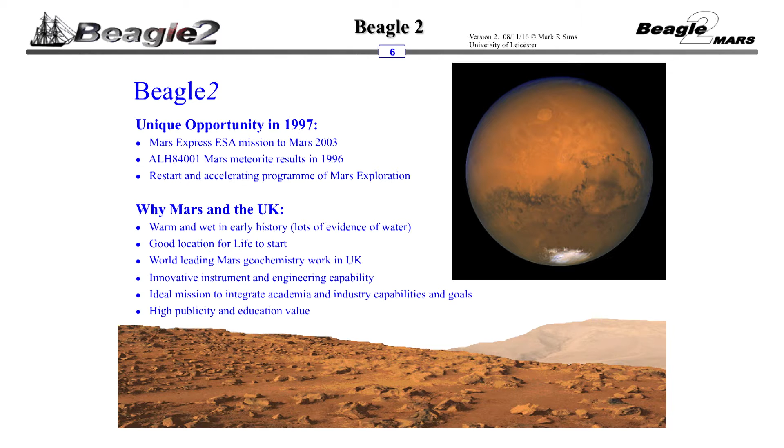Why bother with Mars? I should explain that the picture behind me, if I can focus this, is actually the best view you'll get of Mars from Earth. It's a bit of a cheat because it's taken with the Hubble Space Telescope, and you see this red world, thin atmosphere, ice caps, etc. Very cold, very inhospitable to life as we know it today.

But 4 billion years ago, 3 to 4 billion years ago, it was probably warm and wet. We have definitive evidence of that. Lots of evidence of water on the surface, and a good location for life to start. So that's why people want to go and explore Mars.

At the time, Colin's group and other people within the UK were world-leading geochemists. They still are today. And so it was natural that Colin would propose a lander and try and answer the question, is there or was there life on Mars, using the instrumentation and techniques he developed. Also within the UK, we're very well known for our innovative engineering, our innovative instrument design, and so that folded into the mix of Beagle 2.

And it was a unique opportunity back in 1997. It was the only European mission going to Mars. It was take that opportunity or not do it. And Colin saw this as an ideal mission to integrate both the academic interest in going to the planet and the industrial capability within the UK. And of course, a high publicity and education value of doing such a mission as Beagle 2.

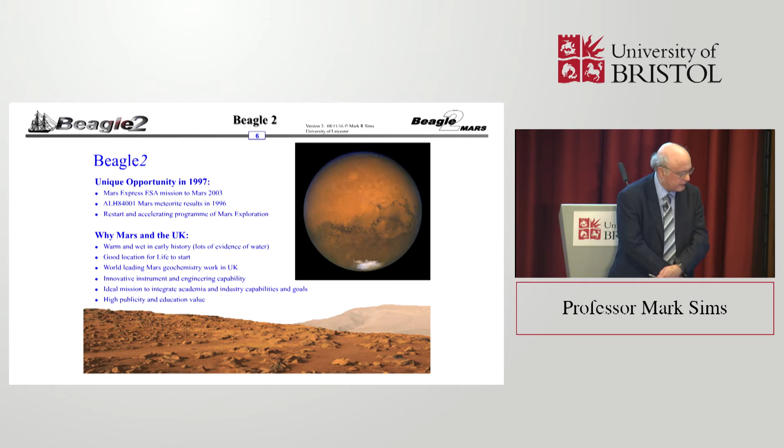Beagle 2 science was unique. Objectives at the time: detection of past life, extinct life, or extant life, present-day life, by looking for organic compounds in the soil, or regolith as it's technically termed. Analysis of subsurface material and the regolith, its geochemistry, etc. And the first attempt at crude radiometric dating by using the decay of potassium to argon in rocks. All of those have only just started to be achieved by Curiosity a long time after Beagle 2.

So the science program was looking at the geochemistry, looking at the minerals, how those minerals are put together in terms of what's called petrology, looking at chemical and physical analysis of the atmosphere, looking at how the landscape has changed, the so-called geomorphology, and measuring dynamic environmental processes on the planet today. And doing some astronomy on the planet as well, looking at the sun, the bright stars, and Phobos and Deimos, particularly the latter in actual fact, because that would enable us, if we got a picture of them, to locate our landing site with high accuracy.

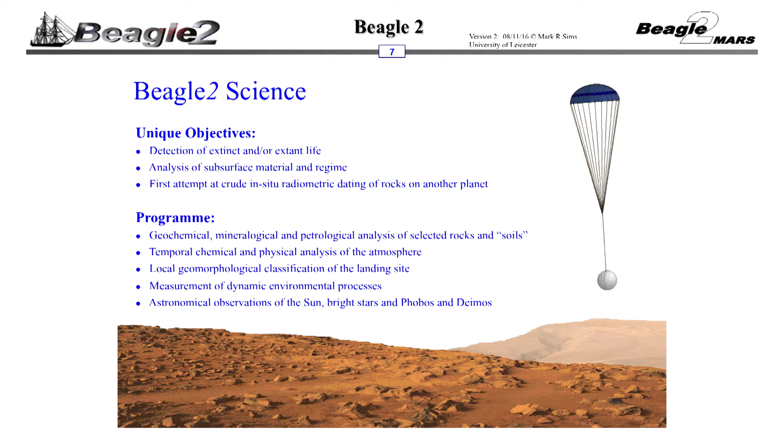In terms of the engineering, you've seen the model of Beagle 2 outside. It's roughly 1.8 by 1.6 meters, not that big. Mass of 69 kilos, of which about 8.7 were for the instrumentation, plus some hardware on Mars Express in order to spin it off the platform. Power is very, very low for Beagle 2. It typically was about 10 to 20 watts.

You'd like to think of it in terms of a modern light bulb. That's the total power that Beagle 2 consumed. And it had lithium-ion batteries. You're all familiar with those in your smartphones, tablets, etc. And solar arrays, state-of-the-art solar arrays back in 2003, built of gallium arsenide to get the maximum amount of power.

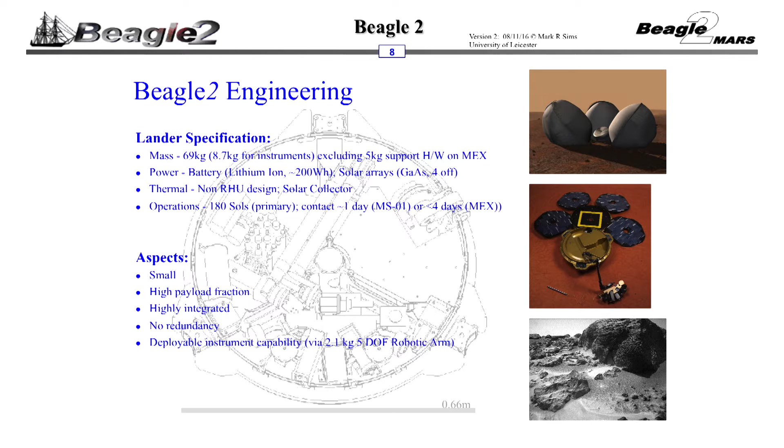Thermal design on Mars is tricky because the average surface temperature on Mars is minus 40 degrees C, and at night it goes down to well over minus 100, so you've got to have a good thermal design. A lot of the missions use radioisotopes to generate heat. Beagle 2 didn't. It had a very clever design using a solar collector, and it was designed to operate for a nominal 180 days on Mars, or 180 sols as they're called, talking to both NASA missions, Odyssey, and Mars Express. So Beagle 2, as you can see outside, is this pocket watch type design.

Beagle 2 had to fold up in order to get all the things we wanted within the volume we were allowed. It's highly integrated, with no redundancy, and it deployed some of its instruments on a small robotic arm.

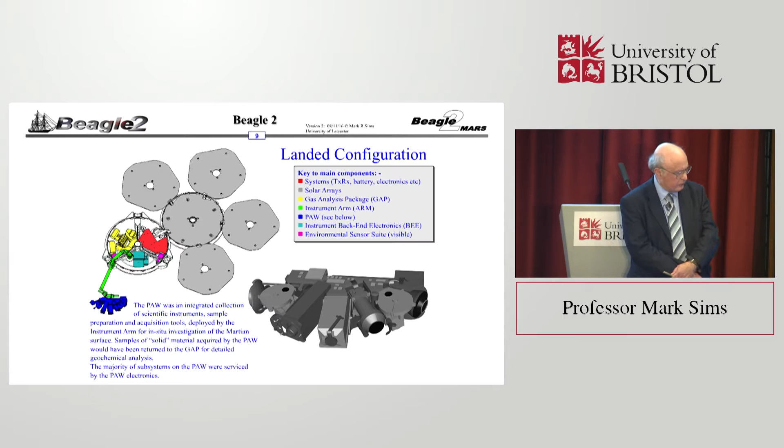We'll come back to that when we get to the questions. I'm not going to go too much through the details of Beagle 2 - some of that's for people interested in the technical detail. But here's a cross-section of Beagle 2 showing its base unit: the gas analysis package you'll hear about later, the electronics, the transmitter, the arm, and the so-called PAW assembly, which was a combination of instruments we'll talk about in a second.

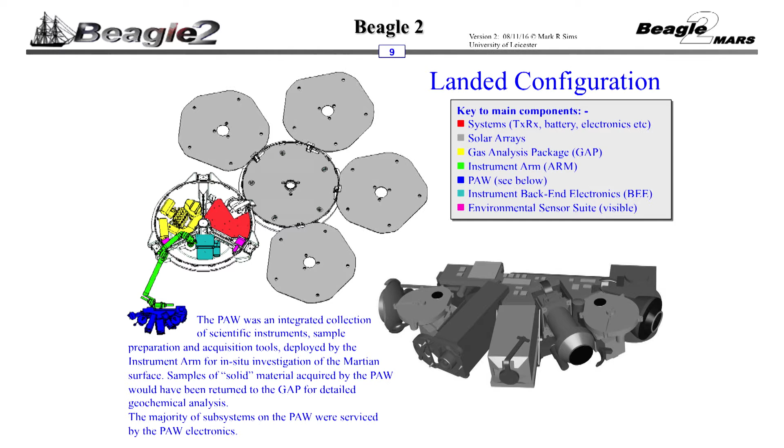So getting Beagle 2 to the surface of Mars - the so-called six to seven minutes of terror. It's the same for every mission: you have to slow the thing down. The first way you do that is using friction in the atmosphere, which heats the heat shield to very high temperatures.

You then want to stabilize the probe at supersonic speeds as it transitions to subsonic speeds, so it has a small pilot chute and a rear cover, which were then detached, and then the main parachute was deployed.

Beagle 2, as you saw in the animation, was cushioned on impact by a set of airbags which were inflated with ammonia gas. On impact with the surface, the main chute would have cut loose. Beagle 2 would have bounced across the surface and then deployed itself.

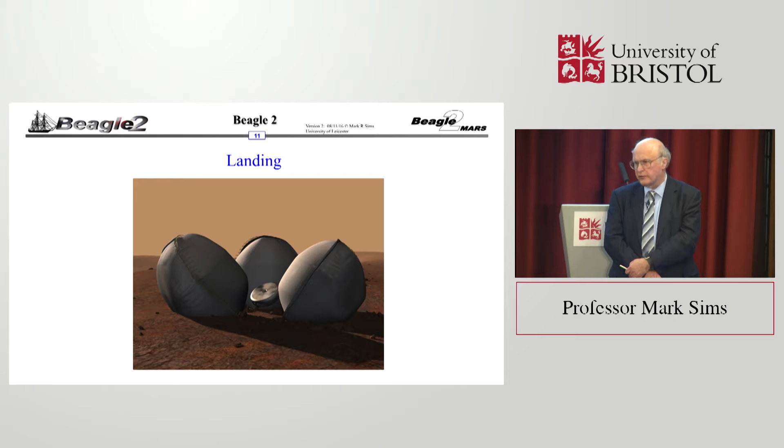So on landing, it would have looked something like this: large airbags about 1.2 meters across. Beagle 2, remember at this stage still folded up, would have been pushed away by their internal gas pressure, fallen to the surface, and then deployed itself.

So a bit of project history. Conceived, as I said, back in 1997 - the first official meeting was in May that year.

We then wrote a proposal to ESA, which I hand-carried on a plane to ESTEC in Noordwijk, Holland, and delivered it with a few hours to spare before the deadline. In May that year, the European Space Agency came back to us and said it's far too heavy - you're going to have to redesign it.

I was actually on holiday in Scotland and got a plaintive phone call from Colin saying, 'we've got a problem, what are we going to do about it?' So when I got back, we had a meeting and redesigned Beagle 2, which originally had a small rover on board, down to a static lander of 60 kilos. In the end, it ended up being 69.

In 1999 it was a busy year in terms of funding. We got an industrially-based project manager in February. In July we got some initial instrument funds, and later in the year Lord Sainsbury gave us our initial government backing. The ESA Science Programme Committee, which has to approve all missions, approved us in November that year.

Then in year 2000 we were vetted by NASA. John Casani, who was chief engineer at Jet Propulsion Laboratory at the time, came over and did an extensive review on Beagle 2. His conclusion was: what we're doing is nuts, but it seems to work, so keep going.

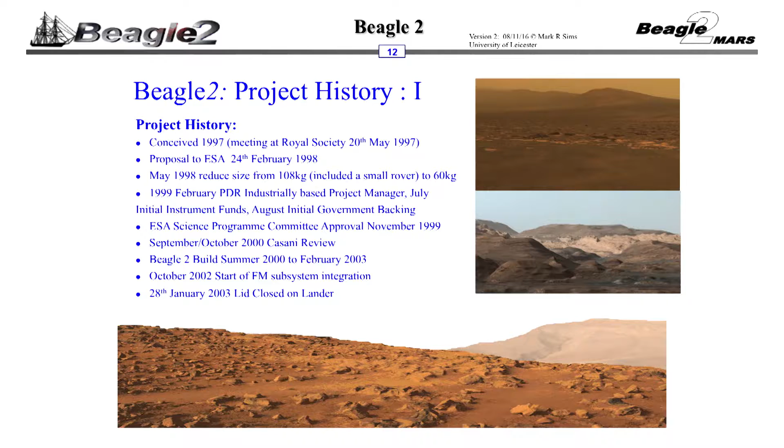So we got Beagle to the launch site by the skin of our teeth - I think we all fully accepted that. It was launched on a Soyuz Fregat launcher on the 2nd of June, 2003, and on the 19th of December we said goodbye to it.

It was spun off the main spacecraft - I'll show you a picture of that in a minute. Landing was due in the early morning of Christmas Day, 2003.

And then we never heard from it. We were expecting a transmission via a NASA spacecraft, and we expected a transmission to Jodrell Bank. We heard nothing. In March 2004 we essentially closed the book on Beagle 2 and did our own post-mortem.

In November 2014, we started to see some images of what could be Beagle 2 on the surface of Mars - I'm not going to spoil the latter part of my talk by discussing that now. The picture to the top right, by the way, is one of the latest pictures by Opportunity on the surface of Mars.

It's starting to explore this valley on the side of this crater, and the column in the distance is actually a dust devil on Mars, which is a few hundred meters across.

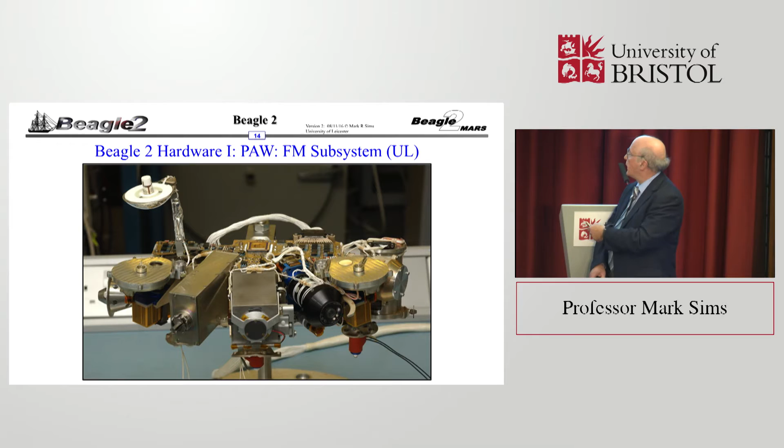So back to Beagle 2 hardware. This is a picture of the PAW assembly. We have 2 stereo cameras, a microscope, a corer grinder, an X-ray spectrometer which looked for the elemental composition of the rocks, and a Mossbauer spectrometer which looked at the iron content. Bolted along the back of the PAW was a so-called mole, a self-burying subsurface drill.

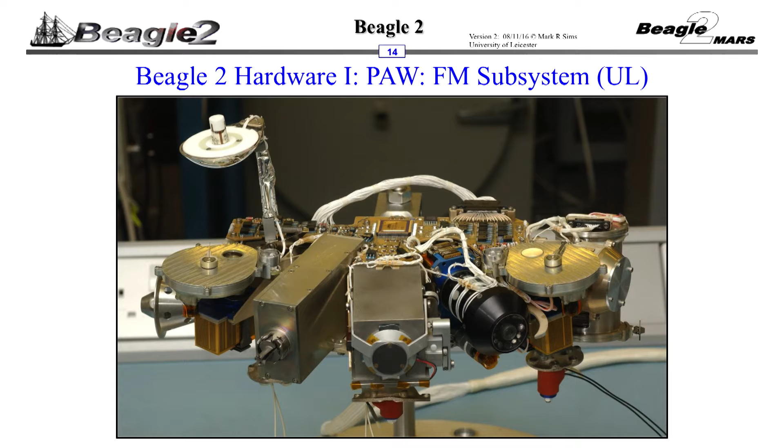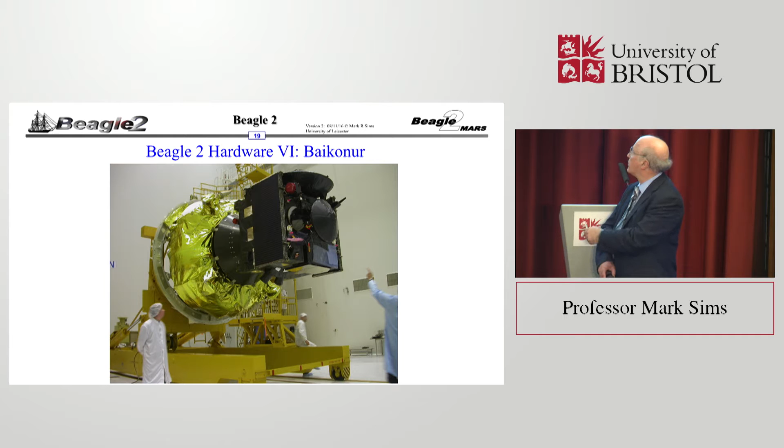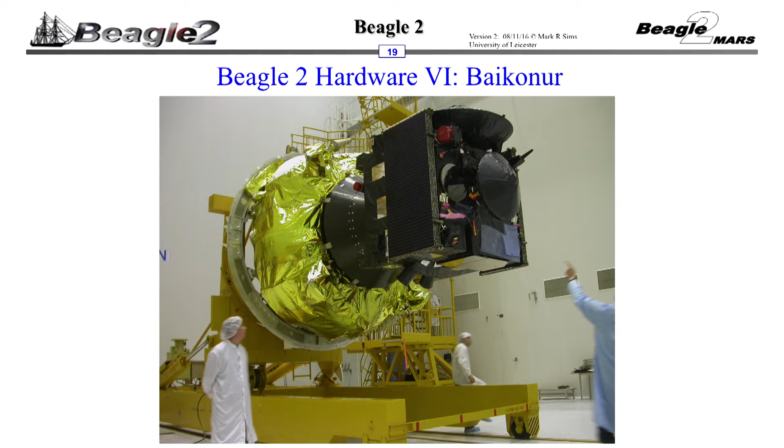Taken to the launch site, which was Baikonur in Russia, and mounted on Mars Express. Mars Express isn't that big, as you can see by the scale of the people, and Beagle 2 is now covered in a rather nifty black MLI, which has higher performance than the shiny stuff. On the 2nd of June 2003, successfully launched and on its way to Mars.

We checked it out a number of times on the way to Mars, including updating the software. As far as we were concerned, Beagle 2 was healthy and ready to land on Mars.

At 8:31 on the 19th of December 2003, Beagle 2 was spun up in order to give it some stability before it hit the atmosphere. Think of a gyroscope - if you try and topple it, it will tend to stay upright. That's why Beagle 2 was spun up.

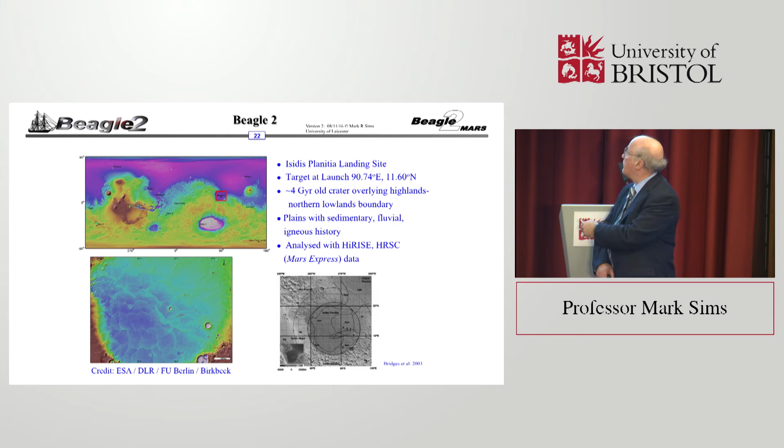So where was Beagle 2 aimed at? It was aimed at a place called Isidis Planitia, a big old impact site on Mars. When an asteroid hit 4 to 4.5 billion years ago, it was then backfilled with what we think was sedimentary fluvial rock and also igneous rocks.

This is a close-up of the Isidis basin, and that little area there, which actually isn't that small - it's over 60 kilometers long - is where Beagle 2 was targeted.

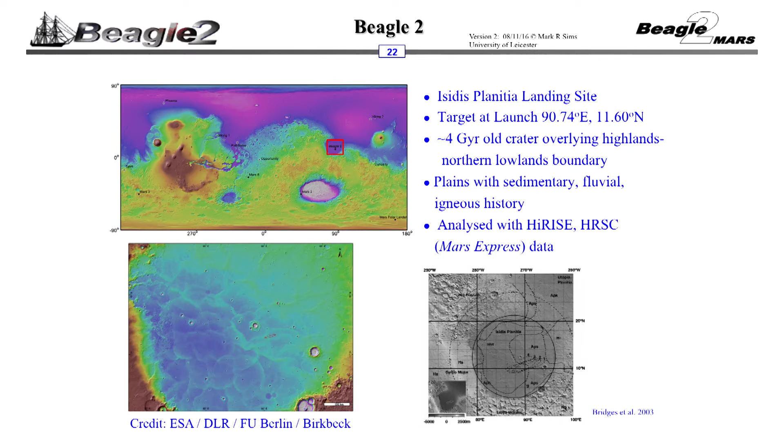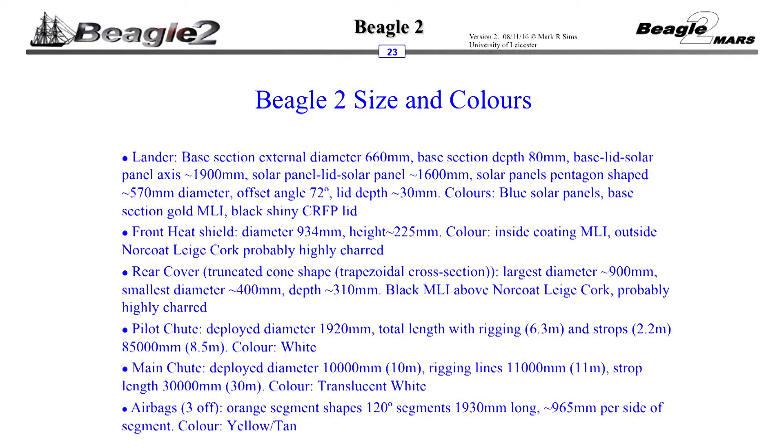The airbags would have deflated, and unfortunately we should have made them bright green, but they were orange - the same color as Mars. So they would have disappeared. I'd love to see the airbags in some of the images we've got today.

So how do you look for a lost lander? Well, we looked with Mars Express and the cameras going around Mars at the time, but they're relatively poor resolution - good in that it's meters or tens of meters, but you're looking for something a couple of meters across at most.

In 2006, Mars Reconnaissance Orbiter got into orbit with its HiRISE imager, in an orbit of about 250 to 300 kilometers above the surface of Mars, resolving down to about 25 to 30 centimeter pixels. We gradually got a series of images across the landing ellipse for Beagle 2, recalculated in 2006, shown as the blue ellipse shape on the left, with the stripes being the images.

So you've got 30 centimeter pixels, red green blue colors, stereo capabilities with HiRISE. But each of those strips is 6 by 15 kilometers and contains 1 billion pixels. Beagle 2, at its largest extent, is 8 to 10 pixels across. So it really is needle in a haystack time.

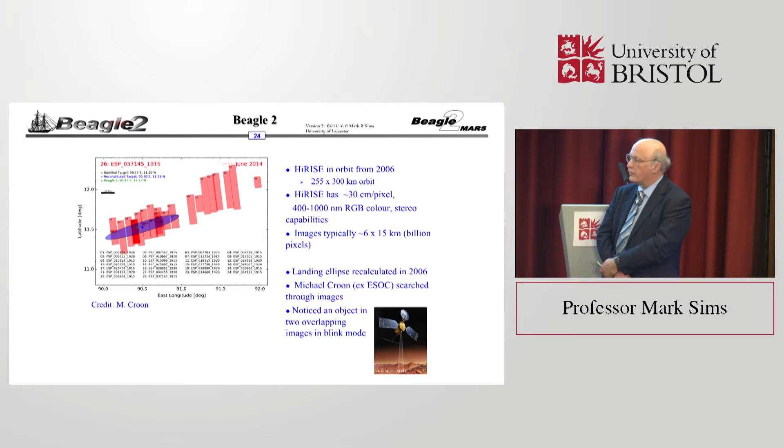He noticed by chance that there was an object in 2 overlapping images. You look at those images on the left-hand side, you'll see there's very few which overlap. He cycled back and forth between 2 images, and he saw an object which stayed there, meaning it wasn't noise in the camera, meaning it was a real object, and it was bright.

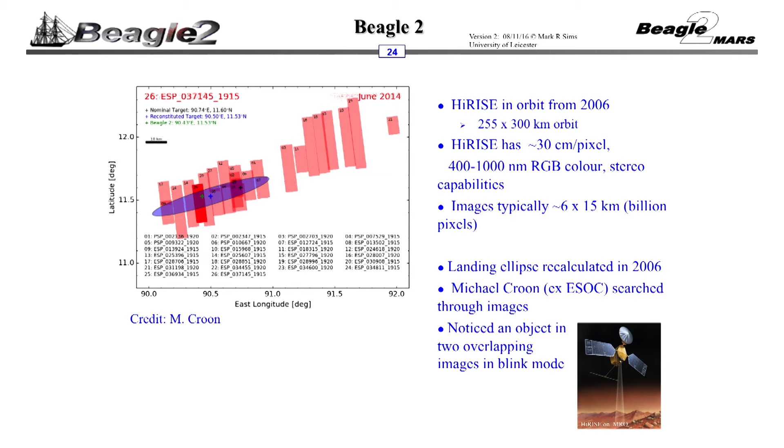He alerted the HiRISE team in Jet Propulsion Laboratory. They alerted us, and as they say, the rest is history.

This is a picture of the Beagle 2 landing ellipse. It's 60 kilometers by 10 kilometers. And this is the little area in which we found Beagle 2.

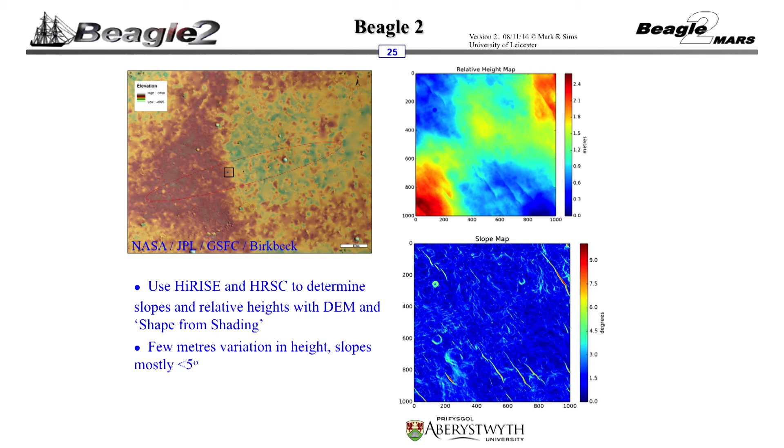This is some work done by the University of Aberystwyth, which looked at the heights across that area where Beagle 2 landed. You can see the scale, it's only a few meters, and the slopes are a few degrees, basically. So it was a great place to land.

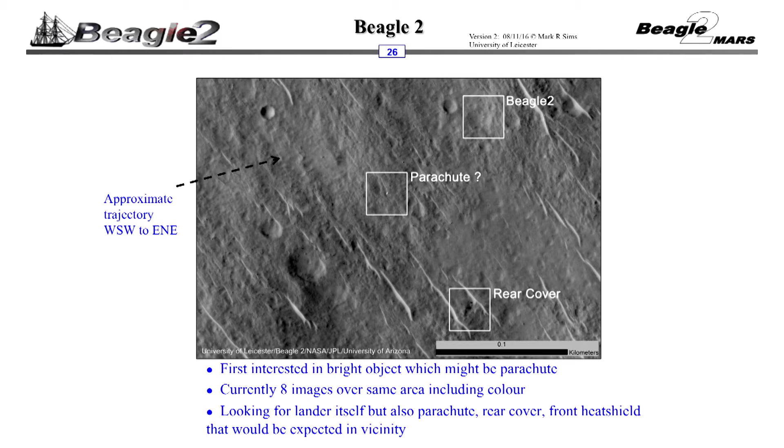Currently, we have 8 images, including some in colour, but we're looking for, ideally, all the components of Beagle 2.

This is some image processing done by Tim Parker, the Jet Propulsion Laboratory, on the colour image. Colour image is slightly different resolution - it's the way the camera works. You still see the main parachute.

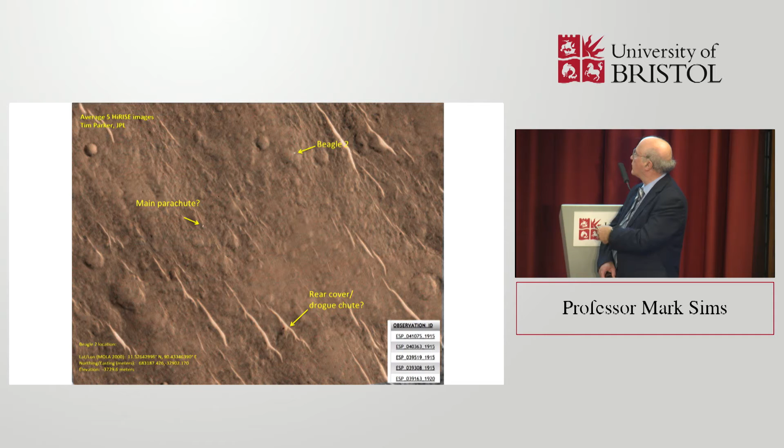You see some peculiar impact here, which we think is a rear cover. You see Beagle 2 up here, but you also see a bright spot just north of Beagle 2. I'll come back to that in a second.

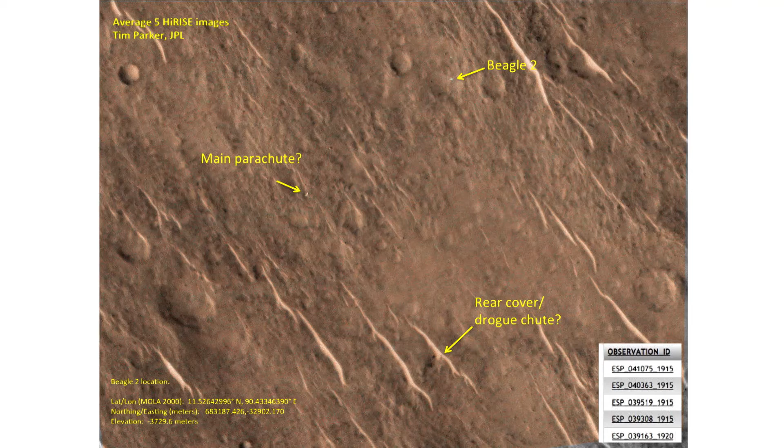This is a close-up of the impact point, we think, of the back cover and the drogue chute. Why is it black? The soil has been turned to black, because Mars has a very oxidized surface. If you like, Mars is a rusty planet, and any impact disturbs that surface and exposes soil which has not yet been oxidized, which tends to be darker in color.

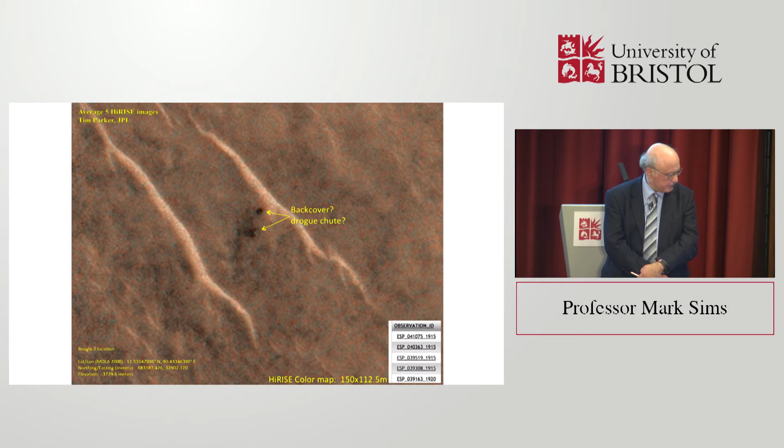So Tim Parker did the very best he could, combined all the images together, and we got what we called the Mickey Mouse shape.

It's the right size for Beagle 2. It's about 2 meters across. It doesn't cast a shadow by the look of it. It's bright. It's flat, shiny surfaces. More about that in a second. And as you can see, the scale bar is 10 meters.

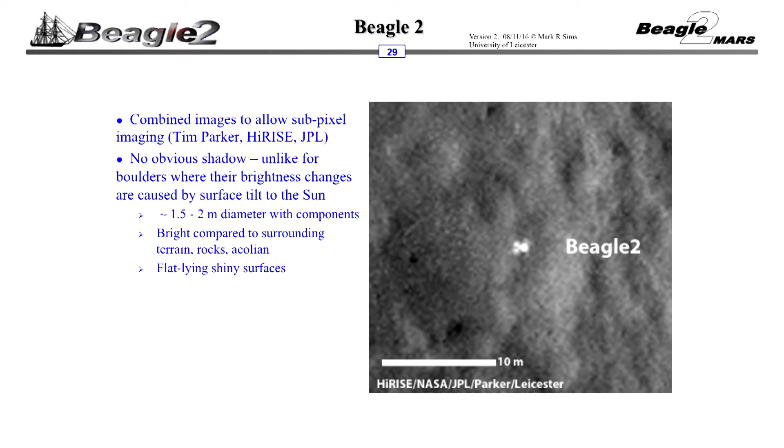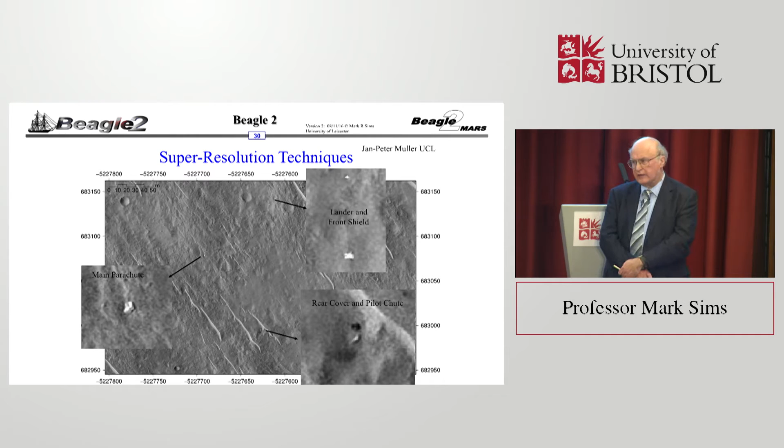Jan Peter Muller, University College London, who's one of UK's top image processing specialists, has a lot of computer techniques for producing so-called super resolution images. He released this data back in April this year, and you see close-ups of the various targets.

Parachute actually might look like a parachute now, the pilot chute and the rear cover, and the lander. And what we now know is the front shield, this bright object we saw. We'll come back to that in a second.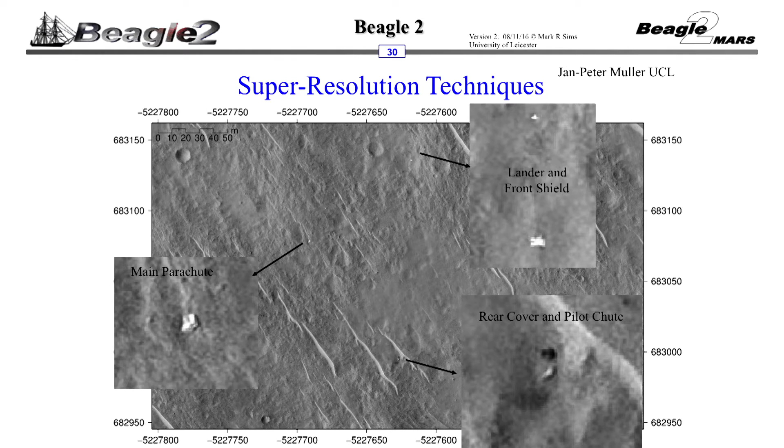So why do we think it's Beagle 2? Is it not just a shiny rock on the surface of Mars? We have a number of discrete elements. Their expected sizes and shapes, and the height. They're not very tall objects. Beagle 2, as you look at that model out there, it's about 80 millimeters deep, some of the sections of it.

They're in the right sequence in terms of the relative positions. You would expect the parachute to be first. You would then expect the lander.

The heat shield could land by the lander or even longer. That's what we see, and the pilot chute and rear cover would be off to one side. There are expected separations, the right kind of separations we do computer modeling with, and they're the expected color, in the expected place.

And what led to the recent press release, there is a glint. The image changes drastically with the sun angle it's taken at. So before we get onto that, what should we see?

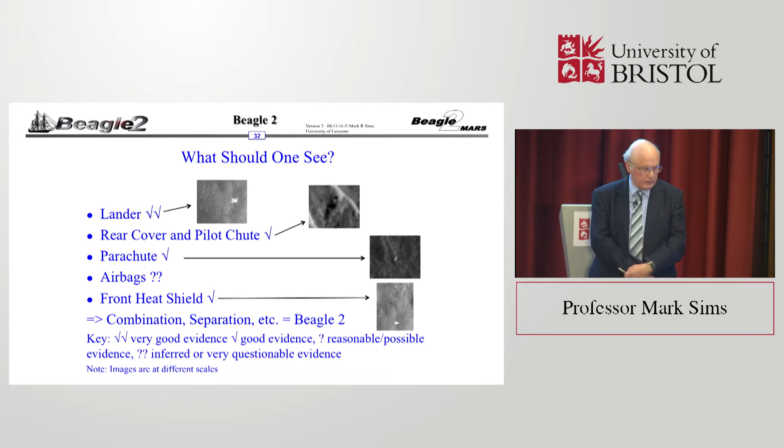Well, we see a lander, and we have very good evidence of that being a lander. We see a rear cover and a pilot chute, and we have evidence of that. We see the parachute, we don't see the airbags for the reason I've said, though I keep looking at the images and wondering, is that an airbag? The front shield we see is a combination separation, so it's definitely Beagle 2, even more definitive after recent work.

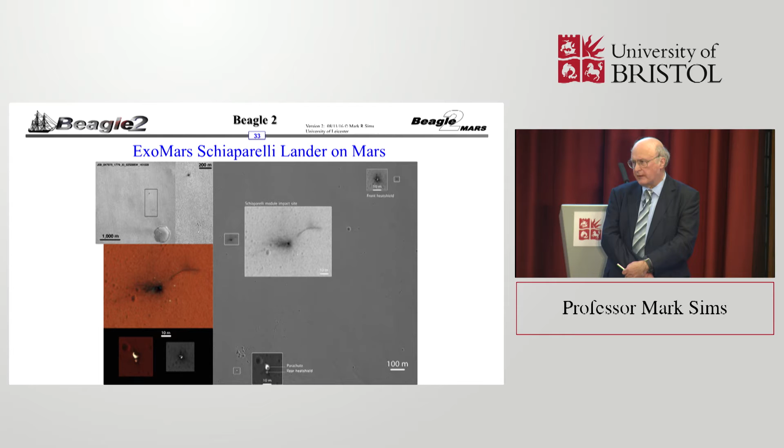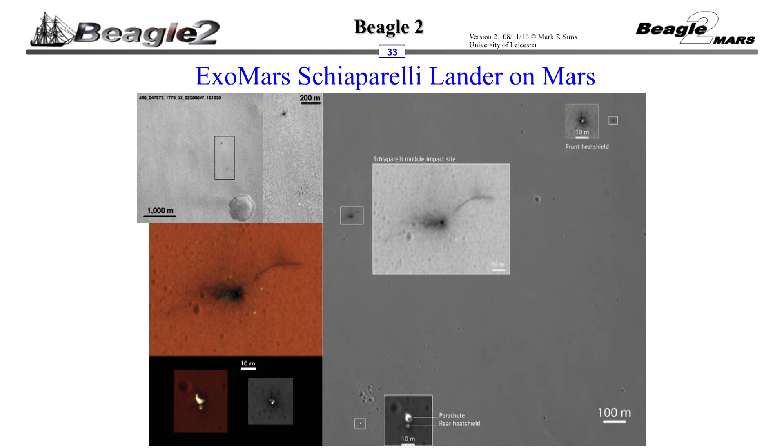Unfortunately the ExoMars Schiaparelli lander crashed on Mars a few weeks ago. These are the latest images from HiRISE, showing unfortunately the point at which it crashed, the explosion point, with bits of the lander around. But you see the parachute, and it does look like the Beagle 2 parachute. As far as I'm concerned, this is the last piece of the puzzle in terms of definitively knowing whether it's Beagle 2.

So what did the data tell us? Remember, you're looking at a blobby shape. The pixel size is 25 centimeters, even after aligning 180 rocks on the surface, which is what Tim Parker did, matching the images. This is as good as you get. And you can put Beagle 2 on it, and as you see, it's the right size.

So you've got the base section, the lid section, and in this case 2 solar panels. In the announcement we made in January 2015, we said it was at least 2 panels deployed. And that glint effect kept nagging at the back of my mind. Everybody's familiar with it - if you look down your road on a sunny day, the glint of the sun off the windows down the road drastically changes brightness and noticeability depending on the angle to the sun.

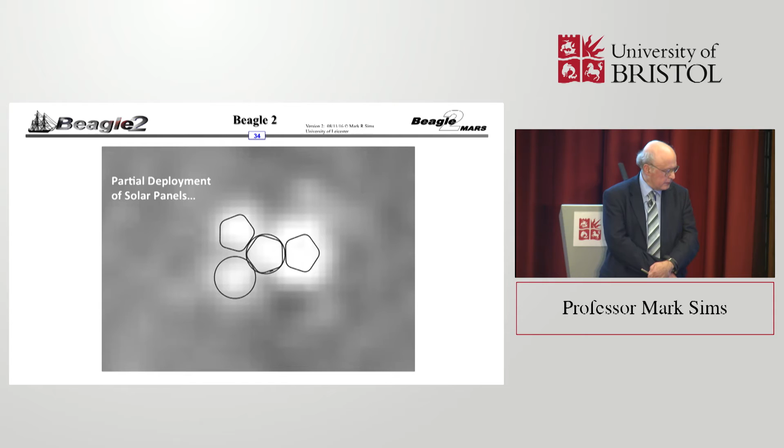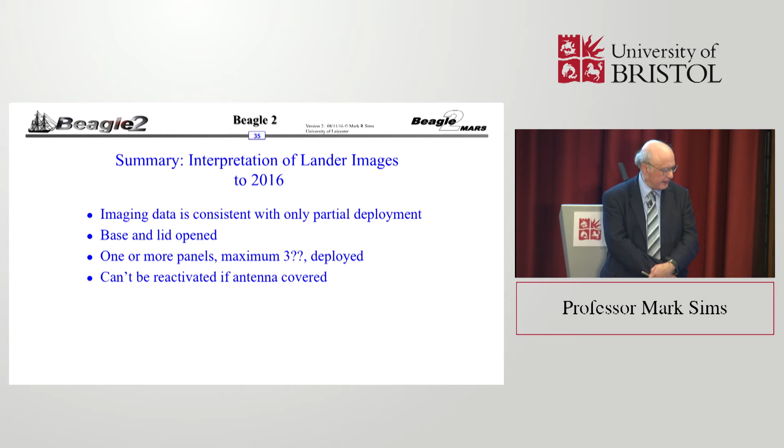So, as of 2016, the image data is consistent with only partial deployment. Base and lid are open, and one or more panels, perhaps a maximum of 3, were deployed. But the kicker in all this - if the 4th panel didn't deploy, the radio antenna was under that panel. And that was not a design error. It was the only place we could put that radio antenna, given the constraints on mass and volume of the spacecraft.

So as I say, this glint effect kept digging away at the back of my mind. And because of a chat with a friend over coffee one night, I got introduced to a team at De Montfort University - they're named there, and the team who's worked with me at Leicester is also named there, and Jim Clemmet, who was the chief engineer of Beagle 2 up until the beginning of 2004. The idea we had was to build a virtual reality model of Beagle 2.

The younger people in the audience will be familiar with that - a simulation of Beagle 2 on the surface of Mars, modeling its optical appearance and its reflections as the sun angle changed. Could we reproduce what we're seeing with the HiRISE imager? We've done that by using our human brain and eye, which is very good at pattern matching - it's also very good at false pattern matching, as we all know.

But we've done some mathematical techniques as well. We've done correlation analysis, a difference between the simulated image and the real images, and we've ratioed the two as well. All of this is to try and avoid the problem of image processing, which can potentially add false things to an image. Most of the time it doesn't, but we're trying to derive the deployed configuration of Beagle 2.

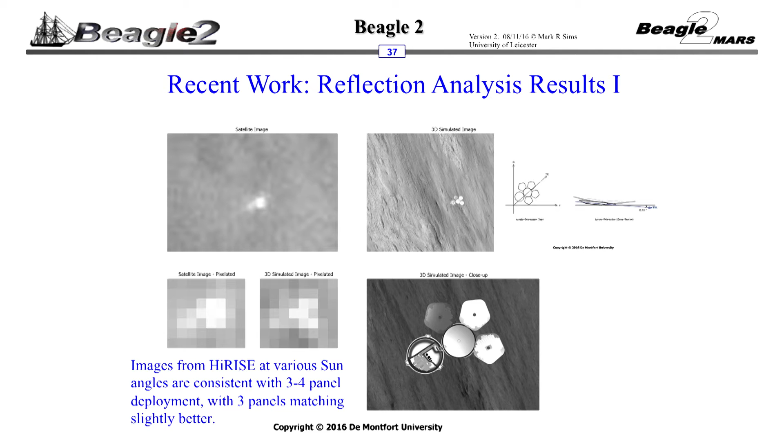It will never be an exact match because we have no idea where these pixels start in relation to Beagle 2. We tried a whole series of different pixelations, moving the edge of those pixels across, and this was the best match we've got. That's actually consistent across 3 different sun angles, and it's consistent with either 3 or 4 panel deployment, with 3 panels matching slightly better.

It was a 6-month analysis. There is more we can dig out of the data. We haven't so far. If 3 panels deployed, then that perhaps answers what happened to Beagle 2.

If 4 panels deployed, and the simulation shows it didn't open to 160 degrees like the other panels, it opened to 130, which was nominal for the mission if it saw enough power. The question is, if that 4th panel did open, why couldn't we talk to it? Is it a timing error, software error, flat battery?

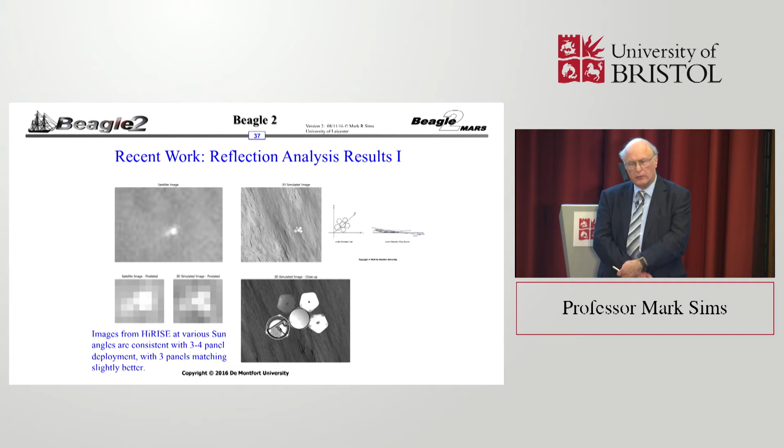We probably never know. And this is a simulation of the heat shield, 3 different sun angles, and these are the reproduced pixelated images. Barely see it there. It's quite strong there. Hardly see it at all there.

And these are the real images at the bottom, which I think is a good match, and it means the heat shield is led on its side, sat on the surface of Mars. So what does it mean?

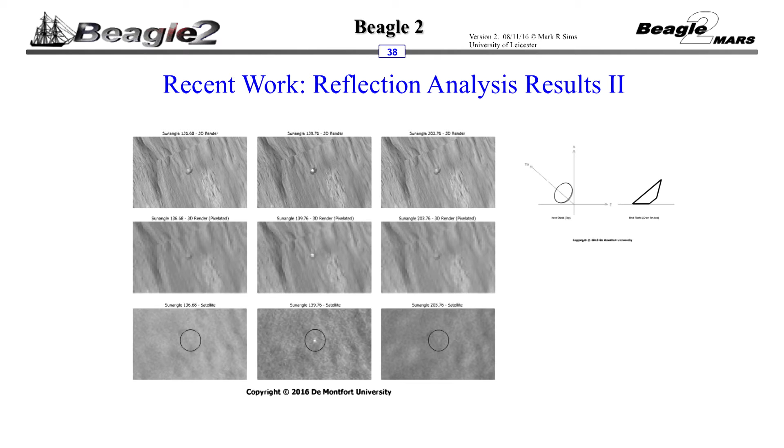To sum up, well, Beagle 2 successfully entered the atmosphere. Its entry, descent, and landing, which is the 7 minutes of terror, worked. The lander software started. Deployment probably started, but maybe didn't finish.

Reason, we have a long list. A lot of engineering analysis has been done, Jim Clemmet has done it, and even if the fourth panel deployed, there's at least 21 reasons why it may not have worked.

So my personal favourite, this is a human being talking rather than a scientist, would be the bad luck scenario. A hard landing because of the thin atmosphere, perhaps distorted the structure, perhaps punctured the airbags, and Beagle 2 didn't fully deploy. So it's on Mars, it's not lost, it worked, it was intact on the surface.

So, success or failure depends on your viewpoint. It depends on your viewpoint in time as well. In 2004, the team, which were over 400 people, worked on Beagle 2, and were pilloried at the time in terms of this was a failure. What have you done? You've wasted all this money, you haven't succeeded.

As we know now, it's not as Rob Manning, chief engineer at JPL, says - you got 99% of the way there. You got the difficult bit done. It's a pity the last little bit didn't actually work. So as I count it, it's a success.

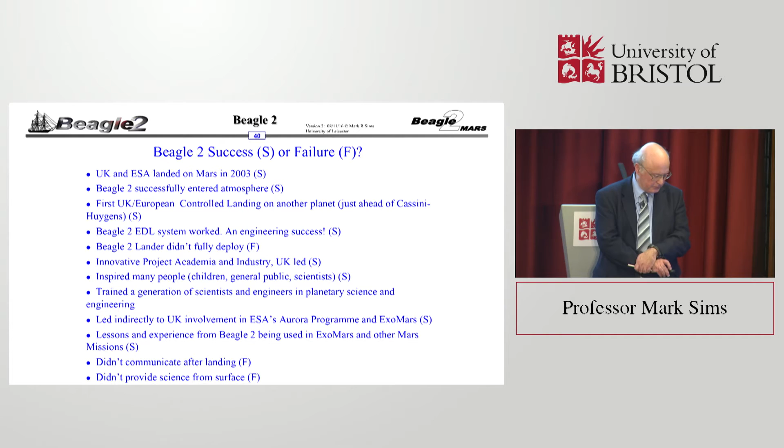So credits and acknowledgements.

NASA, of course, Mars Reconnaissance Orbiter. Tim Parker, Jet Propulsion Laboratory. University of Arizona, which are the principal investigators for HiRISE. Aberystwyth University. Jan Peter Muller's group at University College London. Special mention to Jim Clemmet. De Montfort University enabled the recent analysis to be done. University of Leicester, where I work, and enabled me to take part in Beagle 2 originally.

And a special thanks to Michael Croon, who found Beagle 2 on the surface of Mars. And a very special thanks to Judith and Colin, who made all this possible. Thank you very much.

Well, I'm with you, Mark. I think it was a success, so I'm sure everyone here did as well.

So what I'd like to talk about is the legacy of Beagle 2. Actually, more the legacy of Colin, really. It's to do with the team that Colin built that worked on Beagle 2 and other space missions, and what we've been doing to try and translate our know-how and technical knowledge to solve some problems back here on Earth. There's a list of them, and I'll go through them now.

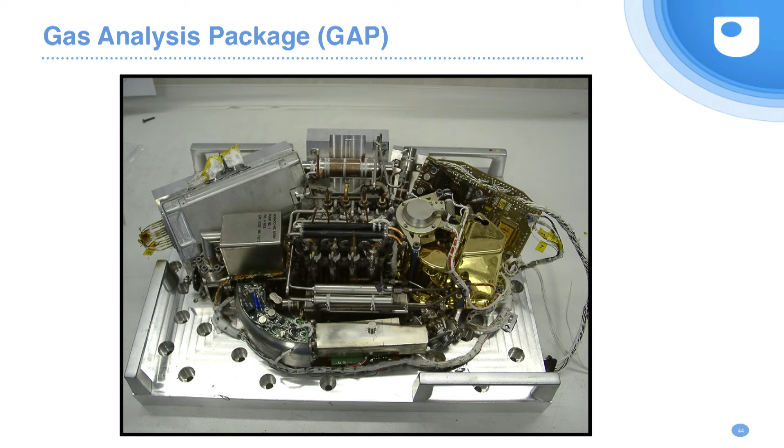So the gas analysis package is a miniaturization of three of our laboratory systems. These are very old pictures, from our old building in fact, and these are all mass spectrometer-based systems, all about the same size as a family car. So we shrunk all that down into the size of Beagle.

I actually joined Colin to work on the system on the top left, called Miranda. It was developed by my colleague Andy Morse, at least the mass spectrometer part, for his PhD. So Colin was actually doing space technology transfer in the 1990s. I joined the group in 1993, so even before we had a name for it, Colin was doing it. That's the kind of person he was.

These systems, the one on the bottom is for doing carbon dioxide. Again, as you can see, the systems are pretty huge.

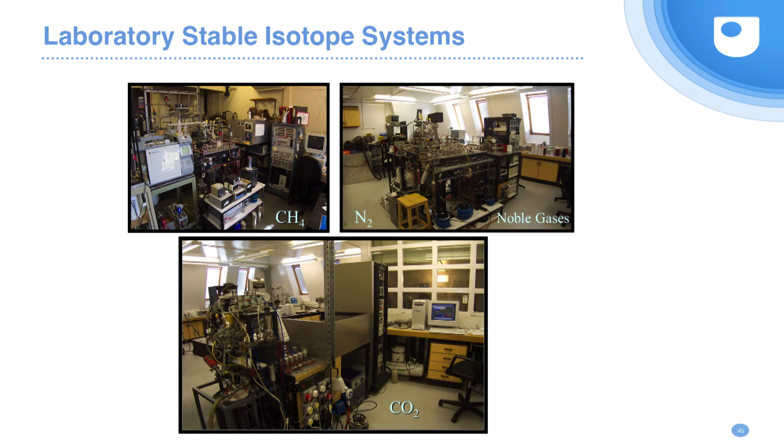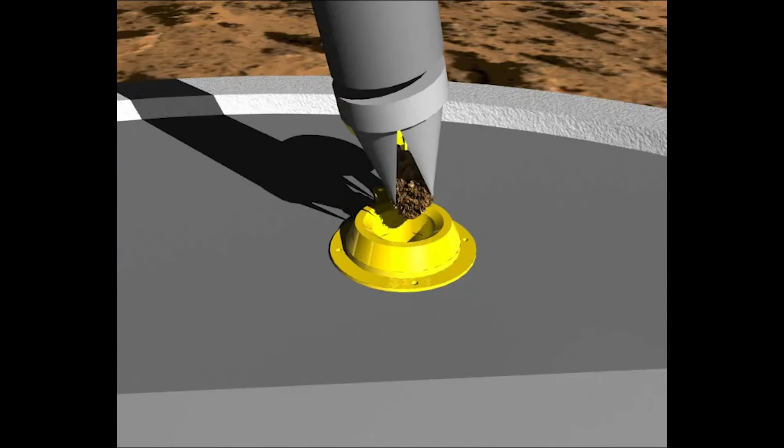So you might have seen the video at the very beginning, you'd have seen the arm bringing in a sample. In a minute, you'll see the arm come down. The idea was we would collect rocks from beneath the surface of the Martian surface to give us samples of rock that were not oxidized.

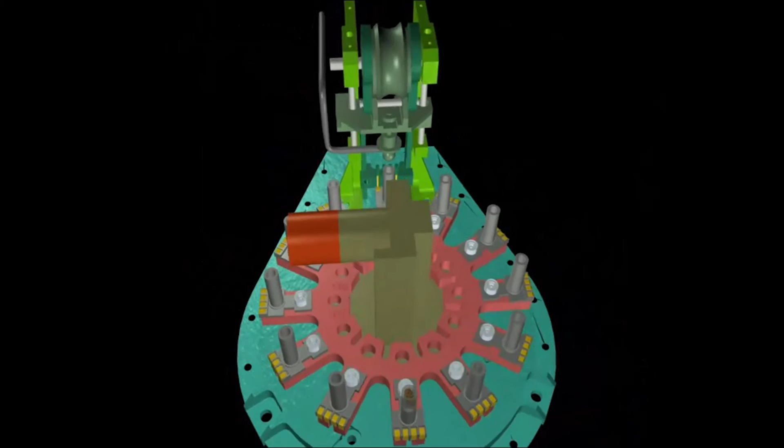It would then drop down into a funnel and into a carousel system with a series of ovens. Each oven was about the size of my little fingernail, made from platinum and capable of getting over 1,000 degrees centigrade. As the carousel turns round, it then goes to a tapping station, and a ball was driven down into the tapping station, deforming the platinum bucket.

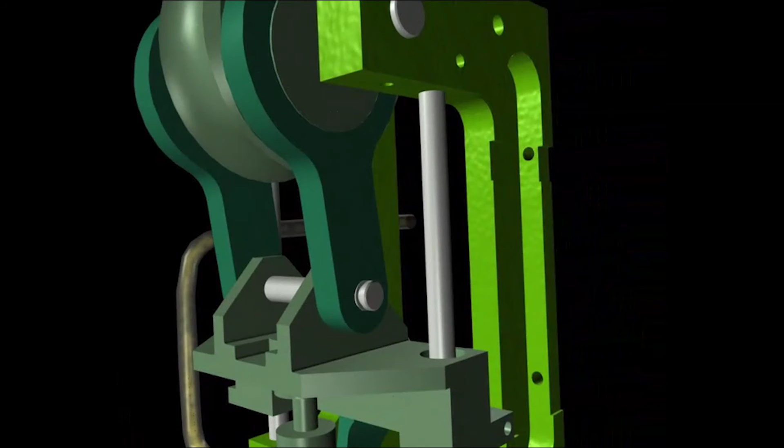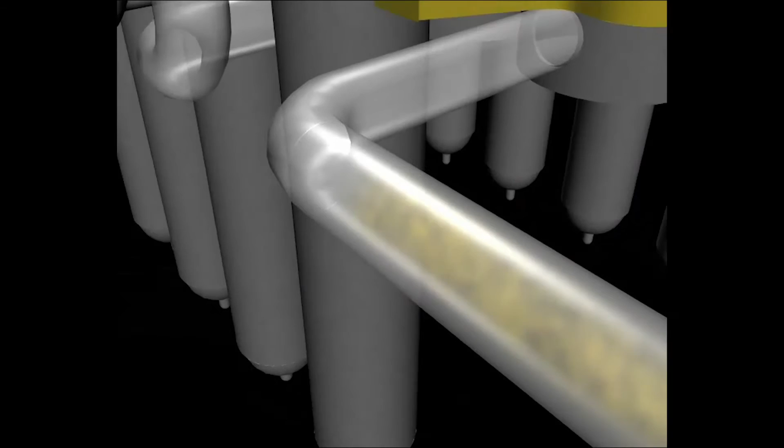You get the electrical connections, and you can heat your sample up in a stepwise manner, and that allows you to fingerprint what's present in the actual sample. So you've turned the rock into a gas, mainly carbon dioxide, and that then goes into a chemistry set, and the sample is processed to clean it up, and then it goes into the mass spectrometer for analysis. These are the kind of analyses that Colin and Ian Wright and the rest of the group do with meteorite samples back in the laboratory.

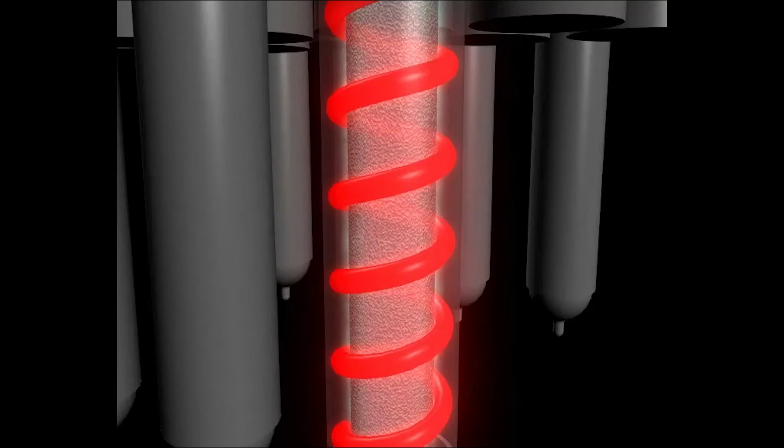So we've shrunk the big lab systems, and we do the chemistry on Mars. Once the gas goes into the reactors, it gets cleaned up, and then it goes into the mass spectrometer.

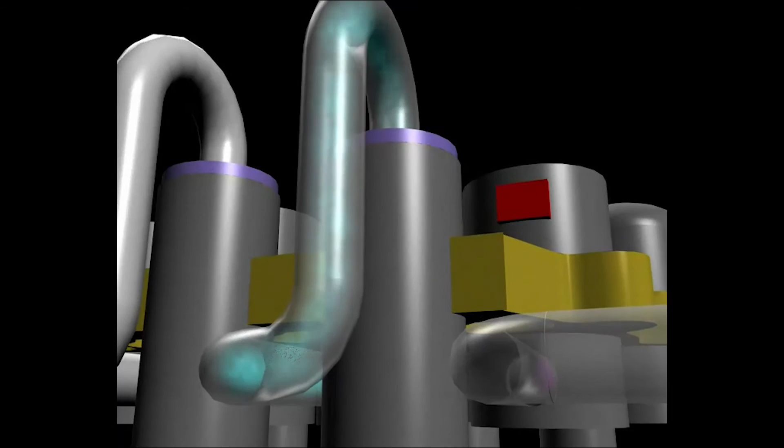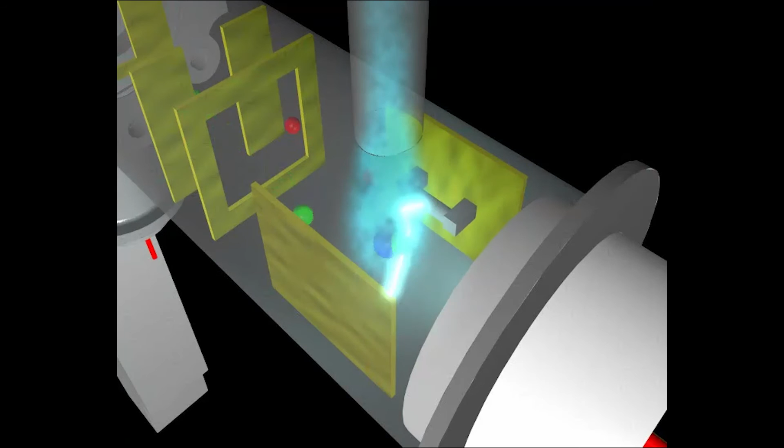So when it enters the mass spectrometer, it's ionized - you'll see some flashing in a minute - and that turns the gas from neutral to ions. You can then accelerate that using voltages, and then it goes through the slits, which allows you to focus the beam, and the beam gets fired around the actual magnet, which is in the shape of a kind of right angle, with a 6 centimeter radius.

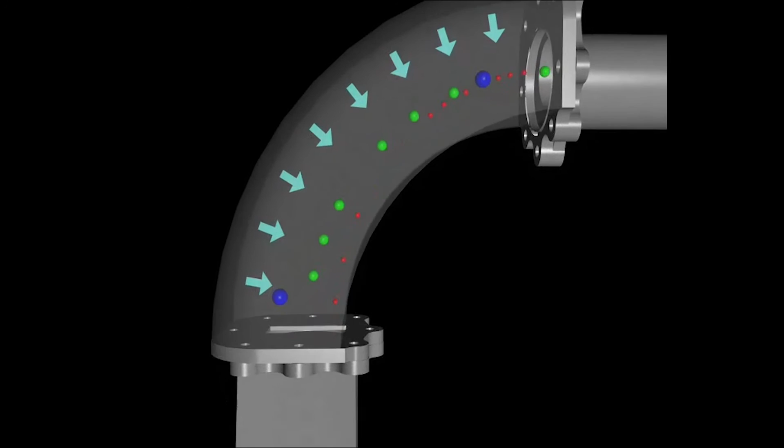In the case of carbon dioxide, we look at mass 44, 45, and 46, and that allows you to separate the different masses present. By looking at the ratio of those compounds - they'll hit a bucket in a minute and you can count those ions - and by counting those ions you get a ratio. Comparing that ratio to standards, you can then relate that back to things on Earth and whether or not things are biological or inorganic in origin.

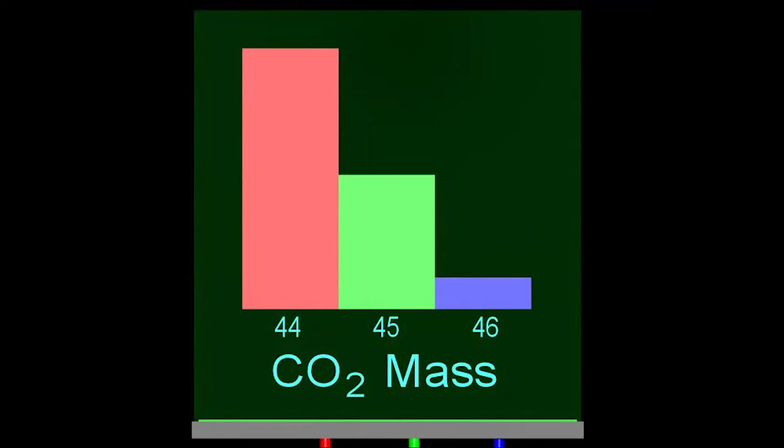And again, that mass spectrometer you'll see a bit later on - we're applying it to some samples here on Earth, but it works pretty much identical to the way that that GAP would have worked. Next slide, please.

So we were the very, very first thing that went on the lander. We delivered that in September of 2001. We launched in 2004. We chased the comet for 10 years and 4 billion miles until, of course, we landed. We landed in 2014.

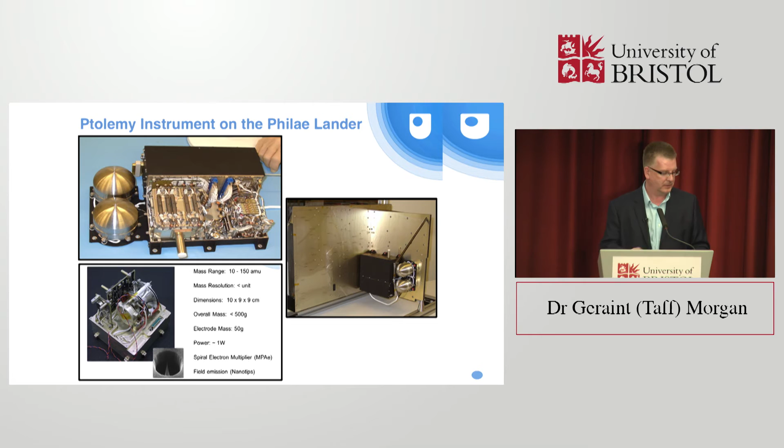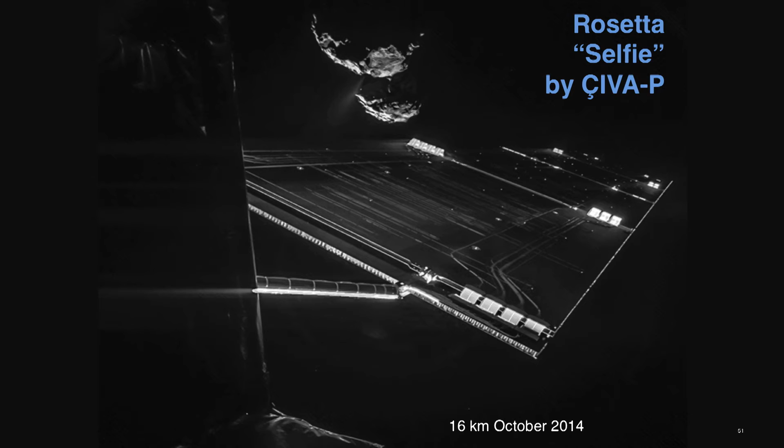It's an absolutely fantastic image taken by a camera on the lander, looking out over the orbiter, looking at the solar panels and obviously the comet in the background. Again, you can see the jets coming out of the neck. This picture also has one of the oldest and one of the youngest things in our solar system in the same picture. So it's a beautiful image.

Before we got to the comet, until about August 2014, we were all working on the assumption that the comet would be the shape of a potato, so it was kind of elongated. Once we had the images back, we then realized it was more like the shape of a rubber duck.

So we then spent several hundred pounds getting a 3D printed version of the comet made so we could decide where we were going to land. Having spent all that money on this 3D printed version, we decided not to mark it. And so Andy Morse popped down to Morrison's, bought a 69p duck.

Simon's son, Matthew, marked up the landing site. The landing site is J, Agilkia. That's where we actually did end up landing - not where we ended up staying, but where we first landed. We took this to the Science Museum for a kids event, and they got really excited. This duck is now saved for history, or whatever you want to call it. So just by marking it with a felt pen, we've added quite a bit of value to this Morrison's duck. If anybody wants any more signed, I'm sure we can get Matthew to mark them up for you. So we actually did land, and as you saw, we had a very exciting ride.

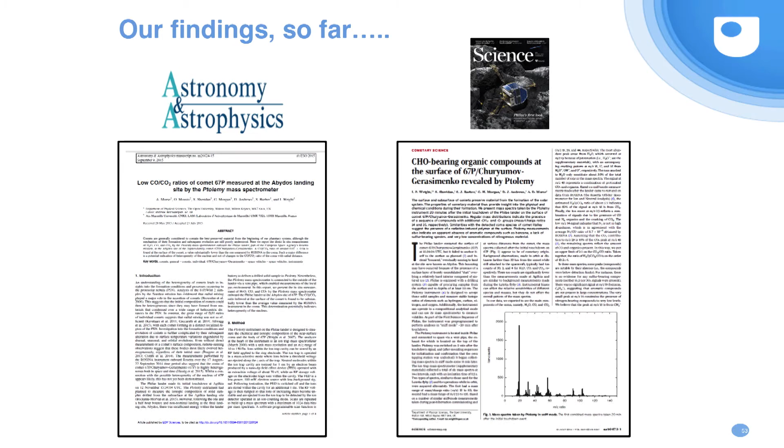So we got data by sniffing the gas that was thrown up. And if you want to know what a comet smells like, under your chair there should be a postcard. So look underneath for your postcards. Some of you probably have already smelt it.

This was something we did for the One Show - my colleague Colin Snodgrass did it. And comets do not smell good. In fact, Alex Jones on the One Show described it as smelling like her granny's toilet cleaner. I warn you that the smell does linger, so I would put it down, otherwise when you walk into home tonight, you'll be smelling toilet cleaner.

So the problem with space missions is they're a bit like London buses - we had 3 together: Beagle, Rosetta, Cassini-Huygens. We're still waiting for the next one. So we had to look at how we could use the technology we developed.

Here you can see the kind of heritage of what I'm about to speak about. It started with the systems that Ian, Colin, Monica and others developed at the Open University for analysing meteorites. We then went through Rosetta, Beagle 2, of course. And then we had various other funding sources that allowed us to look at a whole range of different applications for mass spectrometry back here on Earth.

The reason we could do that is because we developed this world-leading infrastructure. The labs we have at the OU are fantastic, we're very well equipped - again, most of that was down to Colin's funding activities. As important as the technology is having the multidisciplinary skill sets. That GAP team you saw had geologists, engineers, CAD people, chemists, physicists. When you put that disparate skill set together, which is what space missions do, you have a very powerful resource which you can work in partnership with end users to develop a whole range of new capabilities.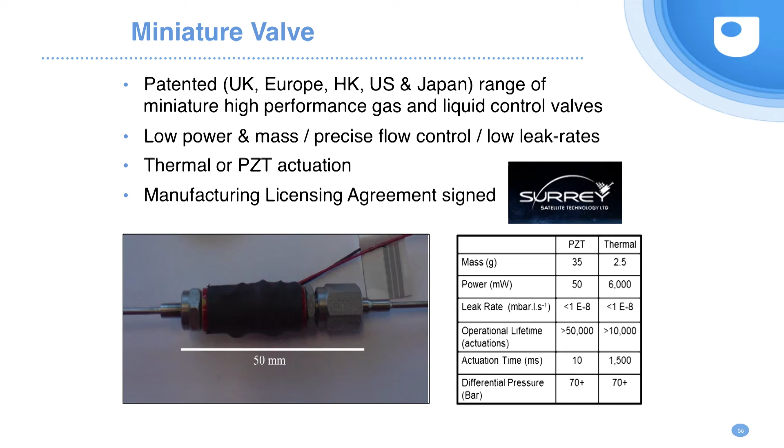It's also been evaluated by NASA, who are looking at it for Resolve, the next Mars mission, or one of the future Mars missions. Again, this valve technology could actually go into space again, and we will be using it for the moon mission.

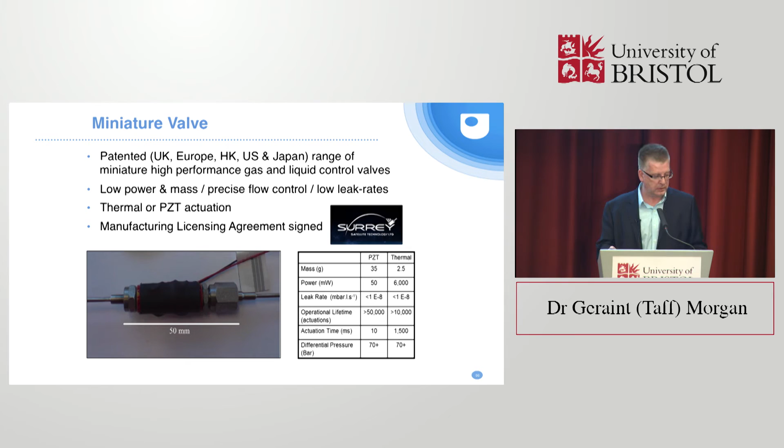The biggest impact project we've had is actually developing a system just down the road in Abbey Wood, the Defence Equipment and Support, MOD. They had funding to look at developing the new successor submarine, which is the Trident replacement submarine, the submarines that basically keep us safe.

We were approached in 2010 to look at whether or not we could develop a new system for them based on Ptolemy. And we did develop a system. It took us less than 9 months. Although we delivered the box to Faslane in Scotland, the submarine was there, the box was there, but unfortunately the paperwork wasn't. So we had to wait 6 months before we could actually put it on trial.

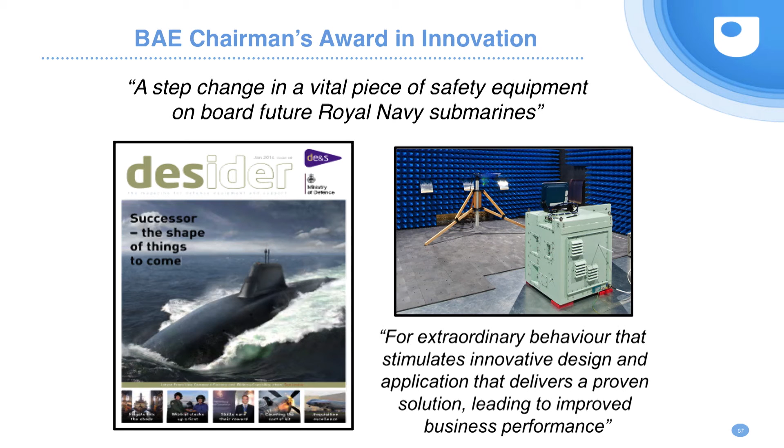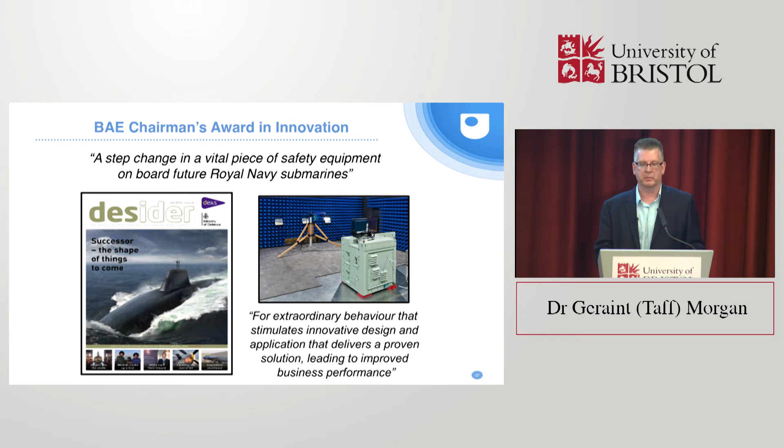But this system has been on sea trial, and basically it has changed the way that BAE Systems design submarines for the future. So currently there's an air monitoring system on board, which is an American system. There's only one of them. A submarine can't go to sea without that working. And our system is much smaller, it's faster, it's better, it's cheaper, and will save the government and the MOD a lot of money. But more importantly, it allows them to have 3 systems on board, so it makes the environment much safer for our submariners.

So we've broken a 30-year American monopoly. Currently, all UK submarines use US capabilities, but that technology is really old now. As I say, it's faster, it's better, it's cheaper, and it'll be a British company that takes this forward. I think they've just announced they're going to call it Dreadnought. It's going to be the first submarines designed to have women on board and have facilities for women. It's the first time they've had an educational facility on board a submarine. So the OU already provides online courses for submariners, but now they will actually have the ability to do training. It's very nice to be part of this, and hopefully this technology will last for the next 50 or 60 years.

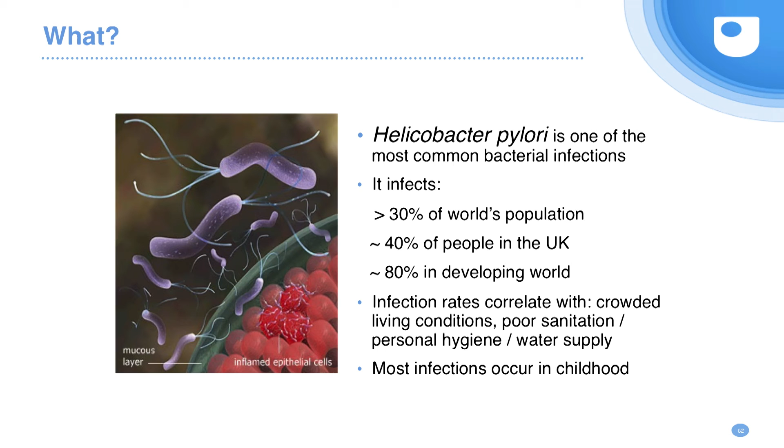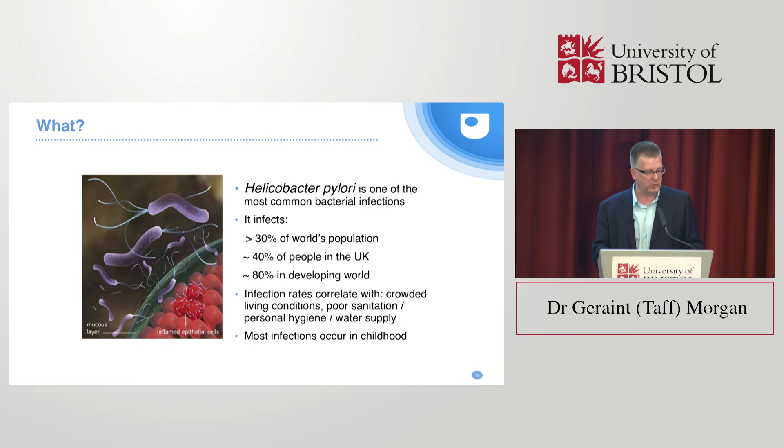But the idea is Helicobacter pylori is a bacteria that about a third of the world's population have. Up to 40% of the UK population have had H. pylori. In the developing world, up to 80% of the population are infected, usually because of poor sanitation and transfer of feces or bacteria. Most people get it when they're kids. The problem is the bacteria gets beneath the mucus layer in your stomach, and it causes ulcers.

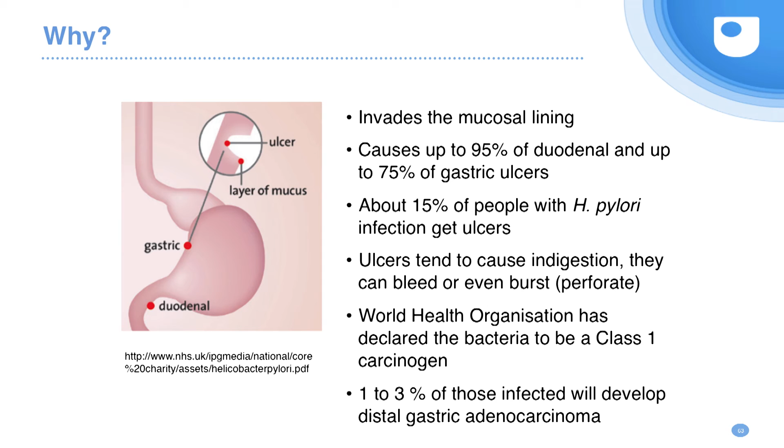So it's not stress that causes ulcers - it's now been proven that it's bacteria. Up to 95% of duodenal ulcers and up to 75% of gastric ulcers are caused by this bacteria. It's quite easy to treat with antibiotics and proton pump inhibitors, but the actual difficulty is getting people to the treatment, or actually to the diagnosis. Up to 3% of those infected with Helicobacter pylori can go on and get cancer, so it's an important thing to treat.

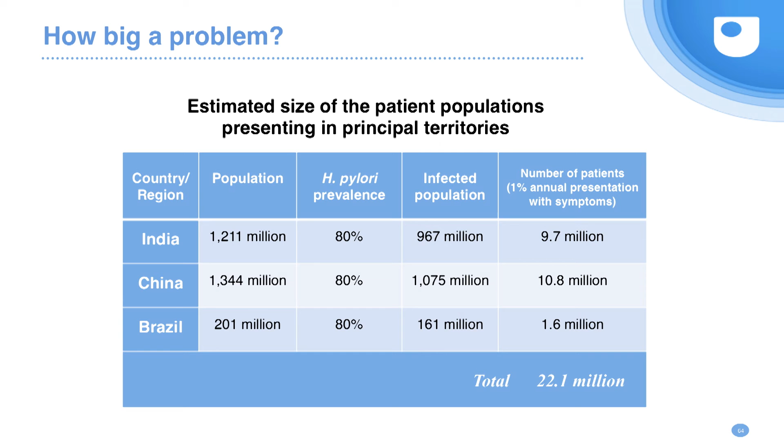Just to give you an idea of the numbers, if you look at India and China alone - in fact I was at a presentation a couple of weeks ago where they said the Chinese government might actually start testing all of their population, because the costs of not treating it early on are so huge. So you could be looking at over 22 million tests.

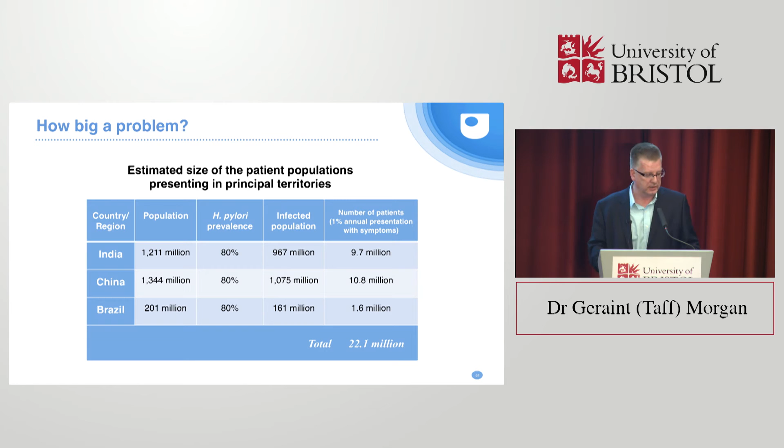What are we going to do? Well, we're going to look at carbon isotopes - exactly what we did on Mars, but this time instead of it coming from rock samples, it comes from breath. If you give somebody an isotopically labeled urea tablet, the bacteria break down and metabolize the carbon dioxide, and it comes out in the breath, and you can measure that shift.

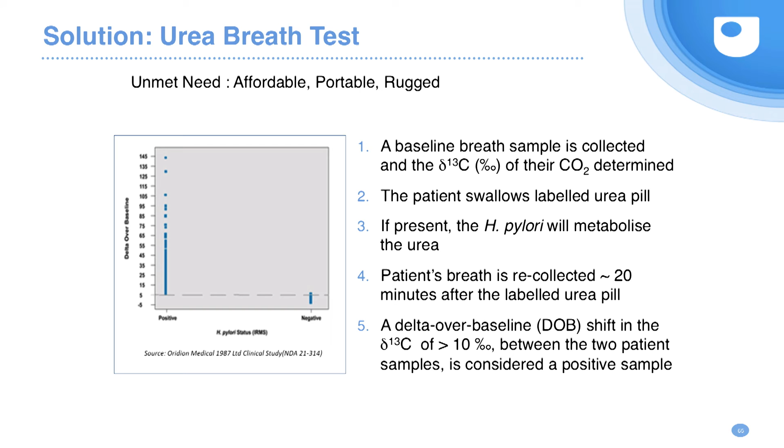Now, the difficulty is that most systems are like the lab systems you've seen before - they're very expensive, and they're not portable or deployable. So what we've done is take the concept of the gas analysis package on Beagle 2, and we've built our own 6 centimeter radius mass spec, but one that's affordable. That can be taken out to places like India and China and used to diagnose people and get them treated.

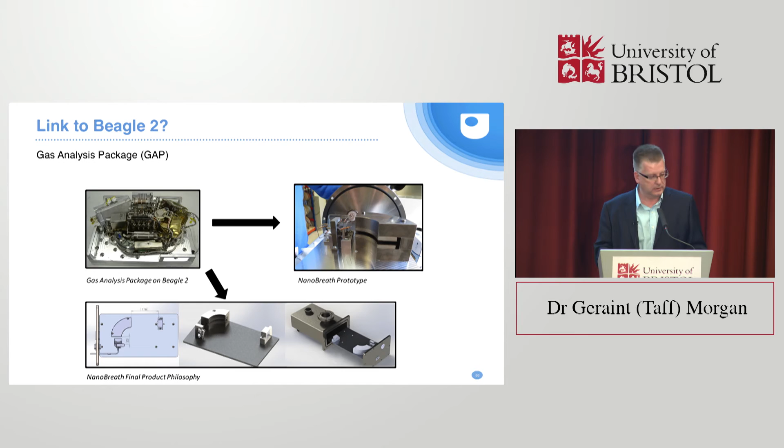Bedbugs are a massive problem. They're huge in places like New York, although apparently New York's only the 18th most populous place for bedbugs - I think Boston's the biggest one. London has a huge problem, the hotels in particular. So the one piece of advice I can give you: if you ever put your suitcase in a hotel, never put it on your bed.

You put it on the ones you get with the metal, with the straps - that's where you put your suitcase, because they can't climb up the metal. That's why they're there. So we basically are looking for the chemicals - bedbugs communicate through their signature scent. You can also find bedbugs if you see little spotting of blood around the place, so we look for that as well. To put it into context, there are nearly 600,000 hotel rooms in the UK.

A quarter of them are actually in London, and nearly 5 million in the US.

What I didn't realize is that most hotels are just a brand, a bit like McDonald's or KFC. They're franchised, so actually you have facility management companies doing most of that work. One of which we talked to said, well, we let the customers find them for us. So I won't tell you which brand that was, but most of the really big hotels are taking this very seriously.

There is some indication that bedbugs might be zoonotic vectors, in other words they might transmit disease. Up until now it's never been thought that they did, but there's been a study at Penn Medicine which suggests they can transmit something called Chagas disease, a very nasty parasite which can affect your heart. So increasingly people are becoming more and more proactive about this.